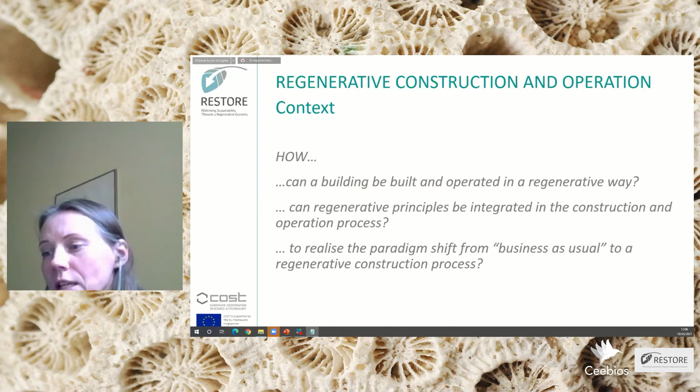The context when we started our working group of our international team in 2018 was to find answers, or get closer to the answers: How can a building be built and operated in a regenerative way? How can regenerative principles be integrated in construction and operation process? And how to realize the paradigm shift from business as usual to regenerative construction process.

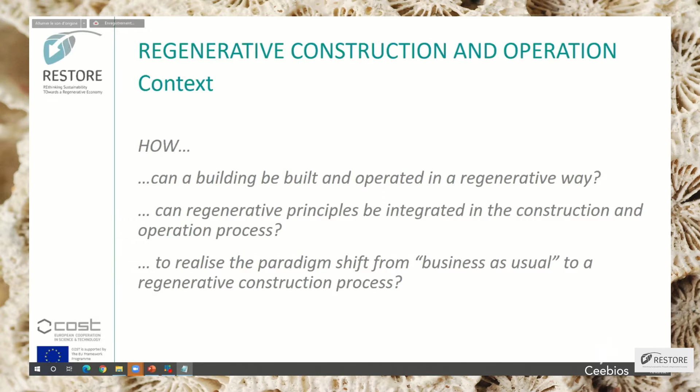The easiest answer is that this can be achieved through integration of restorative and regenerative principles into the construction and operation process, and that's it. However, the current state of the art in construction operation does not include, or only partially includes, sustainable or regenerative values. There are a number of gaps, difficulties, barriers, but also opportunities, which we try to find and investigate.

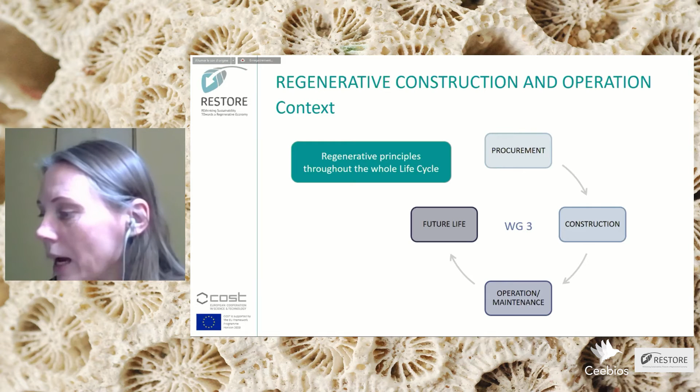This group focused on sustainable regeneration and construction for buildings, landscape, and infrastructure, across the spectrum of sustainability values along the real estate life cycle, the whole life cycle of the urban space. And all relevant interest groups must be integrated in a balanced manner.

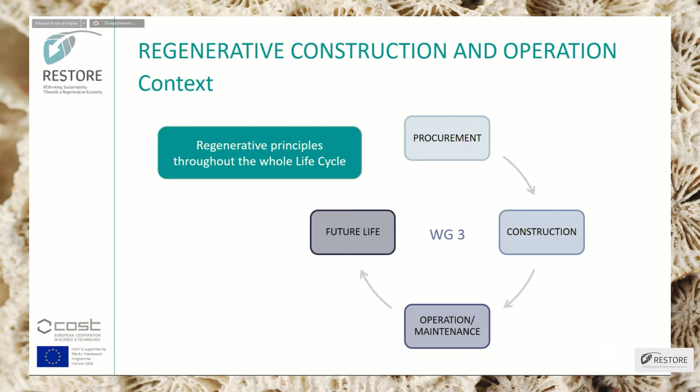So the key phases we focused on are: procurement, considering what follows the design stage and precedes construction, including bidding, tendering, procurement; construction, from preparation of the site up to management of the construction site, including materials and technologies used during the construction process; operation, starting from commissioning and going through operation and maintenance of the building; and future life, considering what happens to the building after its primary life, including refurbishment, retrofitting, reuse, adaptation, and in the worst case, demolition and dismantling.

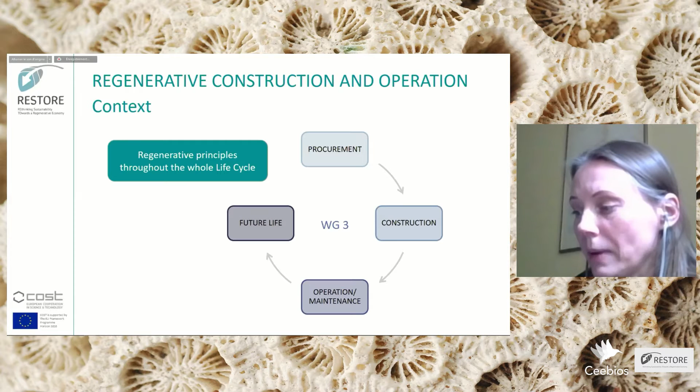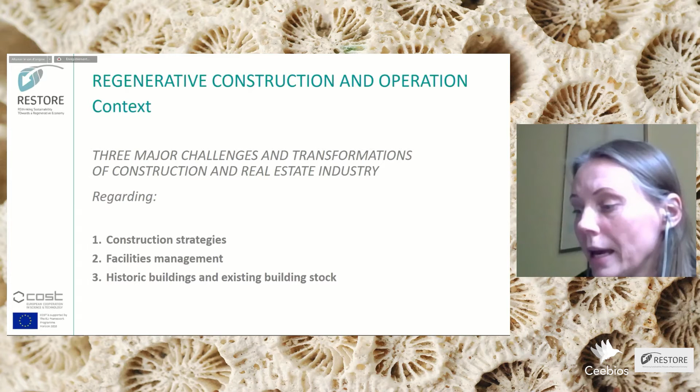The international research identified three major transformations of the construction and real estate industry during the main stages of the life cycle of the building, from construction through operation up to future life. The built environment and environmental impact can drive the steps towards regeneration. We identified three sets of steps regarding construction strategies, facility management, historic buildings, and existing building stock.

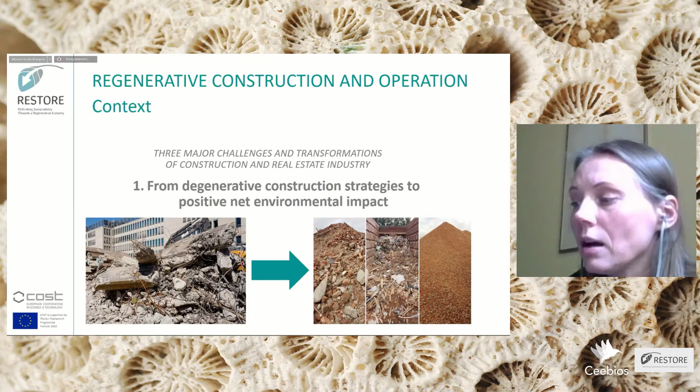Currently, the construction sector is one of the industries generating the greatest environmental impact, including carbon emissions that impact climate change. Using regenerative materials and regenerative technologies encourages all stakeholders of the construction sector to move further, shifting from implementing degenerative or less-bad strategies to strategies that could reach net zero carbon emissions and even provide positive net environmental impact.

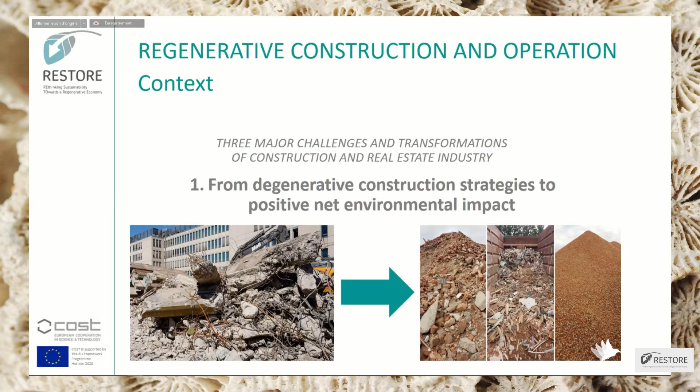There is a shift from classical facility management in one building towards urban facilities management. The importance of the usage phase along the life cycle of the built environment, and solutions in the sustainable and regenerative management of properties and neighborhoods, is needed.

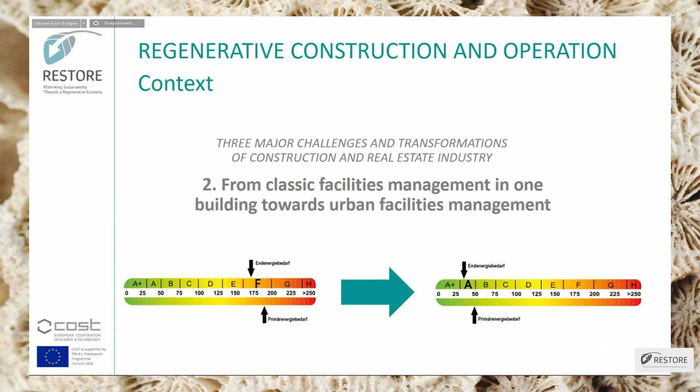Also, facility management during planning and construction is well known, but it is still not applied frequently enough. User and operator processes should be considered, simulated, and optimized, including measures that seem simple, such as an efficient way of putting new buildings, or buildings that have been renovated to their core, into operation.

Finally, adjusted settings instead of factory settings of building services like heating and ventilation not only save energy, but also increase user satisfaction and health. One needs to take further steps from the classic view in facilities management,

from the individual building to the neighborhood level or even the entire city. Urban facilities management would require a paradigm shift in real estate management, new processes, contractual models in letting and management, and a change in attitude of owners and investors, in order to promote regenerative sustainability.

The third step or area is a shift from regenerative drivers only in new buildings, towards regenerative drivers in historic buildings and existing building stock. Historic buildings and environments can become a driver for regenerative sustainability.

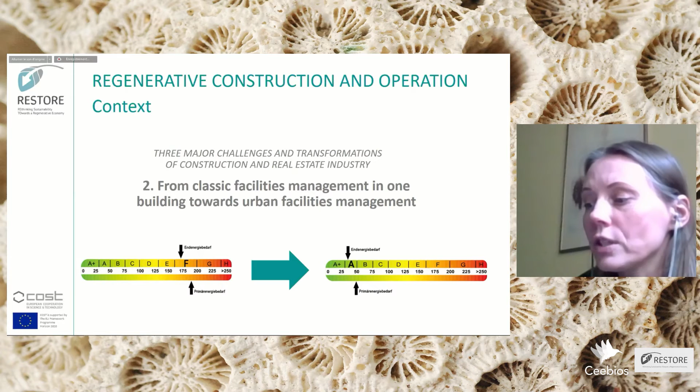The heritage adaptation is an effective strategy to trigger climate change action and community resilience, while meeting the UN 2030 agenda for sustainable development.

Built environment professionals are urged to reflect on the potential impacts on heritage buildings, which may already be subject to strong pressure and risks related to decades of lack of maintenance and redundancy, on top of other vulnerabilities such as hydrogeological instability, depopulation, and abandonment following catastrophic natural events.

Following the mentioned three steps, which are described in the Working Group 3 booklet, we trained a training school and established the RESTORE Network.

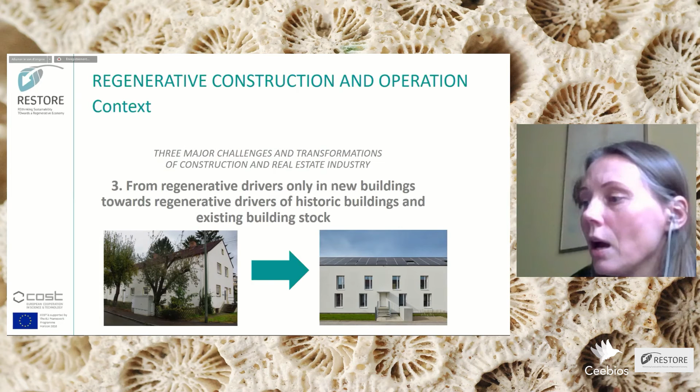Using regenerative materials and regenerative technologies, and encouraging all stakeholders of the construction sector to move further, shifting from implementing degenerative or less-bad strategies to other strategies that could provide a positive net environmental impact.

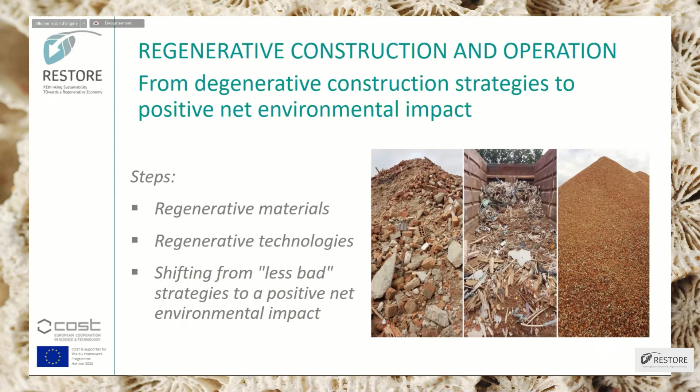The COST Action RESTORE contribution to regenerative procurement proposes how to build a bridge for transition between the regenerative design vision and the realization of that vision. The procurement process can be seen as an invaluable tool to raise awareness and force change through the supply chain.

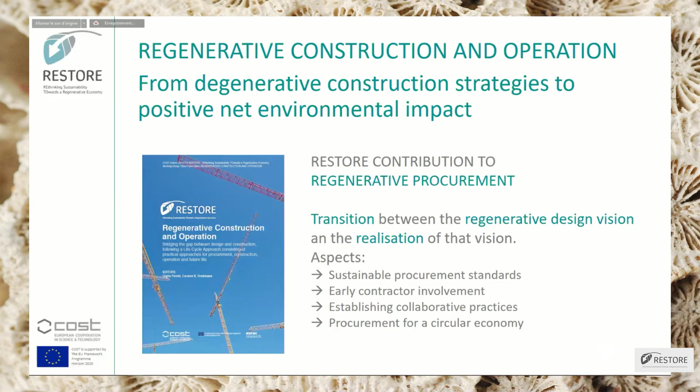Early contractor involvement is a critical approach where a contractor's skills are introduced early into a project to bring regenerative sustainability, design buildability, and cost efficiency to the pre-construction phase. It is essential to establish collaborative principles as early as possible.

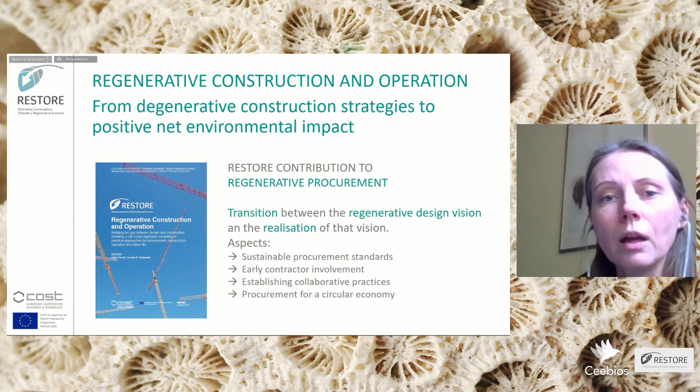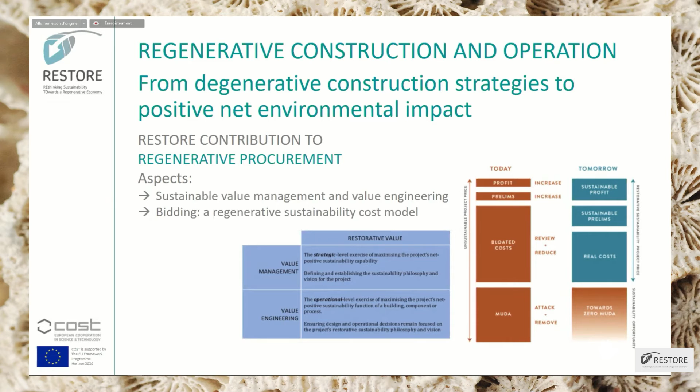As you might see, there is a revised approach of value management and this regenerative sustainability cost model, where MUDA, the Japanese term, was introduced, identifying several forms of waste like transport, inventory, motion, and overproduction—skills that are central to lean management systems.

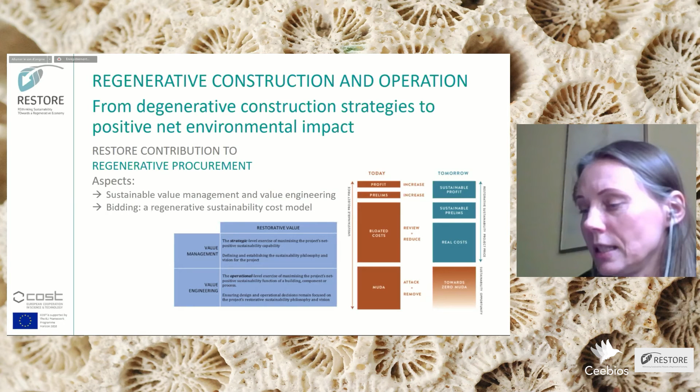There were developed two pre-qualification questionnaires to raise awareness and force change through the supply chain. You can find these two in detail in the working group booklet.

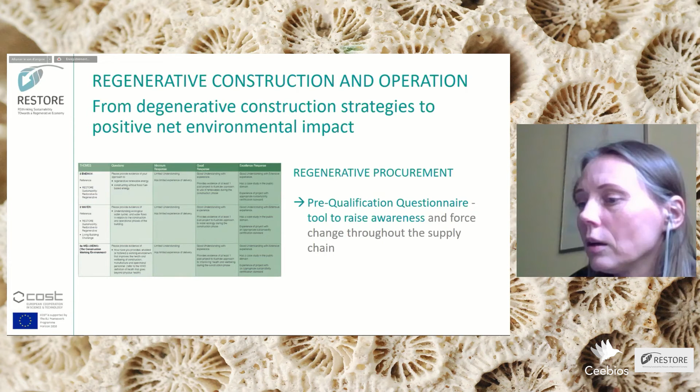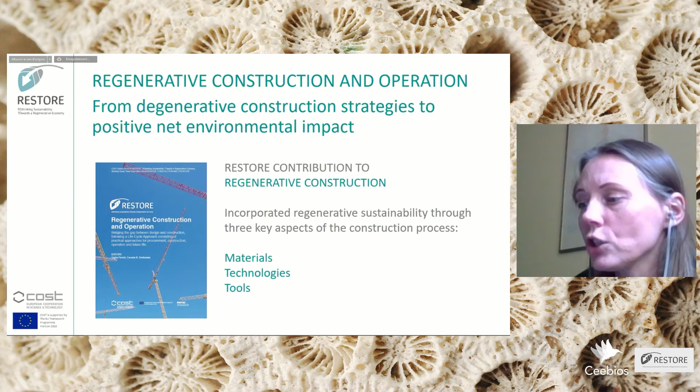In the field of how to incorporate regenerative sustainability through three key aspects of the construction process—materials, technologies, and tools—barriers, challenges, and opportunities were identified.

The working group developed a survey to understand the current situation of sustainability in the construction sector, and also to identify the challenges and difficulties of implementing sustainable construction in Europe.

Advanced and emerging materials and technologies are actually poorly used within the construction sector, as very few respondents claim to use them in more than half of their projects. These materials and technologies have a higher rate of application in new building construction rather than in building renovation.

The recommendations were to increase awareness and knowledge among construction actors of the different possible regenerative materials, tools, and technologies; develop guidelines and manuals; develop specific regulations to promote the construction of regenerative buildings; and provide efficient economic incentives.

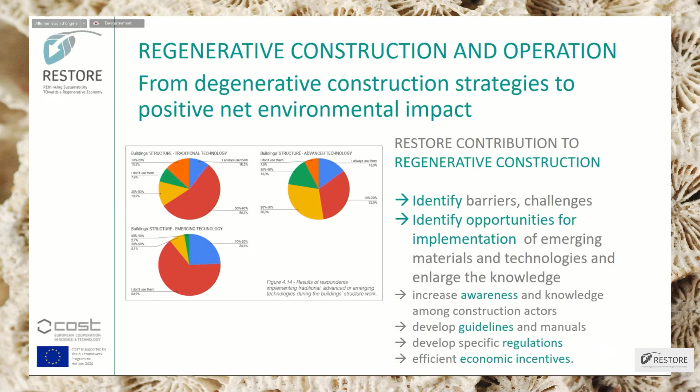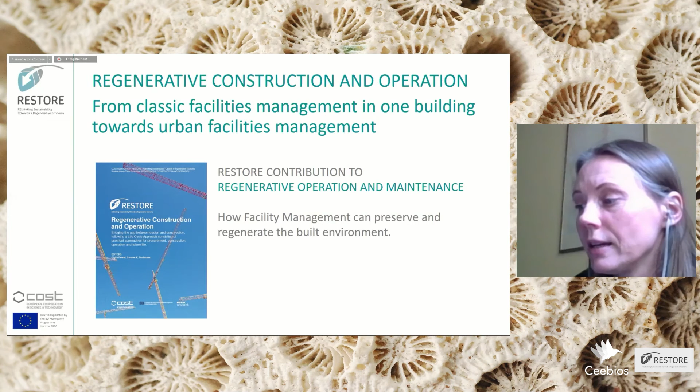The RESTORE contribution to regenerative operation and maintenance is about how facility management can preserve and regenerate the built environment. Three steps are proposed, from regenerative new building drivers towards the regenerative drivers of historic buildings and existing building stock. Step 1 is integration of facility management during planning and construction.

User and operator processes should be considered in early stages. During operation, step 2, adjusted settings of the building services like heating and ventilation not only save energy but also increase user satisfaction and health.

Step 3 is a shift from the classic view of facility management for the individual building to the neighborhood level or even the entire city.

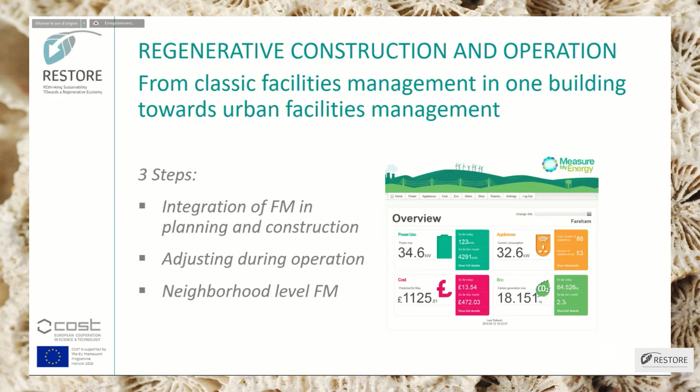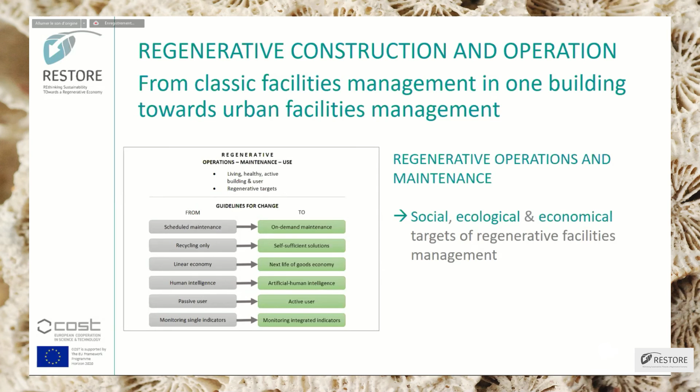Social, ecological, and economic targets of regenerative facilities management were proposed, along with developed guidelines for change to regenerative operations, maintenance, and use. As you may see, there is a table showing how to revise thinking and how to revise the paradigm.

RESTORE's contribution to future circular life was by revising paradigms and concepts of human minds and habits for the future circular construction process.

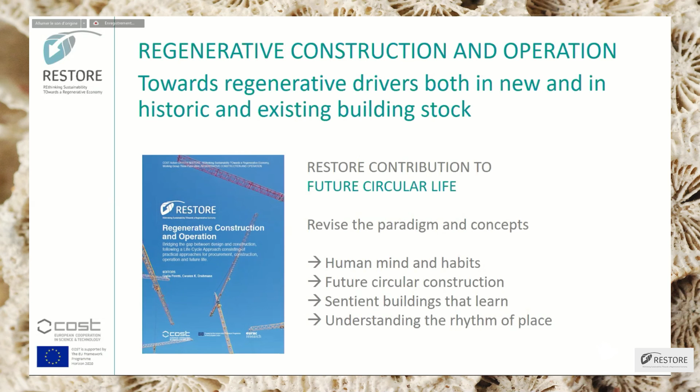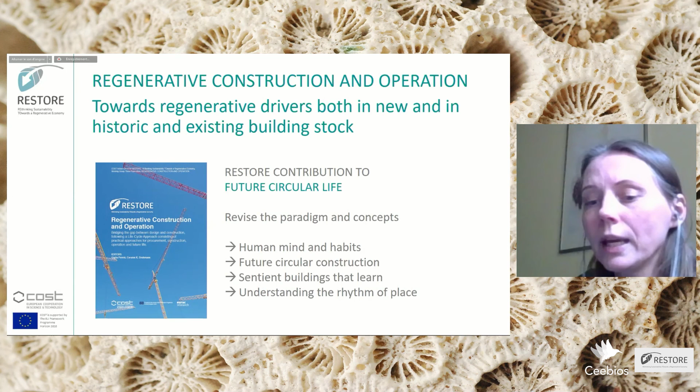It was considered whether there is a possibility to think in the direction of sentient buildings that can learn and understand the rhythm of the place. The concept that building users use buildings until they are worn out and no longer usable is being challenged by the application of a range of innovative regenerative initiatives, including circular economy, cradle to cradle, and buildings as material banks.

Regenerative constructions and operations towards more historic and existing building stock are considered in two steps.

Step 1: adaptation to avoid potential negative impacts on heritage buildings, which might already be subject to strong pressure and risks related to decay, lack of maintenance, redundancy, on top of other climatic vulnerabilities.

Step 2: rethink the concept of existing buildings as a resource, from all urban mines, for new buildings.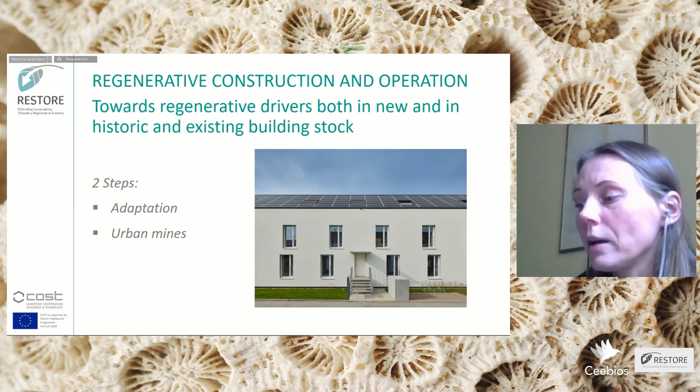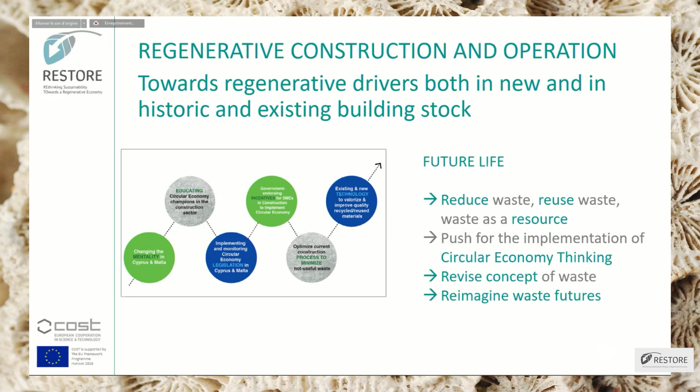For the future circular life, there was a deeper investigation into how to reduce waste, how to reuse waste, and how to use waste as a resource—how to use it as a mine—and how to push for implementation of circular economy thinking, how to reimagine waste futures. Thank you.